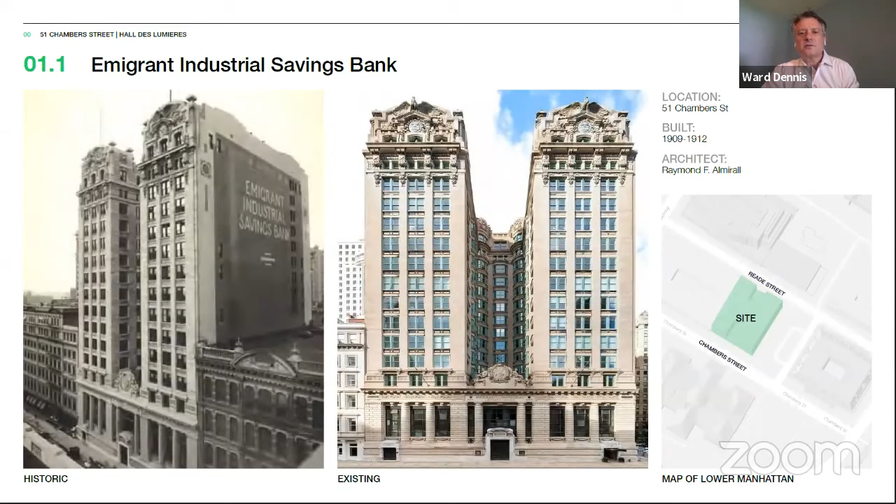Good morning, Commissioners. It's great to see everyone again. As Corey mentioned, this application is for 49-51 Chambers Street, located on Chambers directly across the street from the Tweed Courthouse, right outside the municipal building and right outside our virtual window in the hearing room. The building is an individual landmark and located in a historic district. It was constructed in 1912, designed by Raymond Almirall for the Emigrant Industrial Savings Bank. And of course, the interior of the banking hall is also a designated landmark, and that is the primary focus of the presentation today and the proposal before you.

Just as a reminder, the proposed use for this space, Culturespaces, is a company out of France that operates a number of immersive digital entertainment exhibit venues throughout France. They take different kinds of spaces and repurpose them with video and audio systems that have rotating art exhibitions. The company also manages and operates a number of historic properties in France. So they have a lot of experience, both in terms of transforming these spaces, but also as custodians for the historic spaces. The proposal for 49 Chambers Street would be the first Culturespaces venue in the United States.

This obviously has been a long time in the making pre-COVID, but I think it's very important to note that even with everything we've been going through in the past few months, this project is still very much on track, and it will be a very different approach to banking halls than we're used to seeing, in that it will be bringing hundreds, if not thousands, of people a day through this space, making it a truly public space once again.

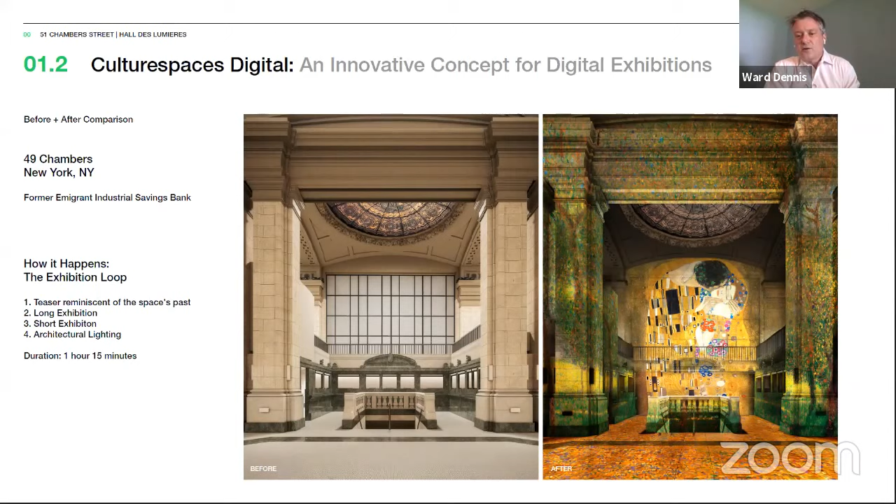The first, and I think most important, was how we were controlling light on particularly the Chambers Street side. Obviously, in order for this program to work, we have to control light within the space. We can't have any light leaking in. We also need to control sound, both the sound coming in from the outside, from Chambers Street, and sound coming out to a lesser extent.

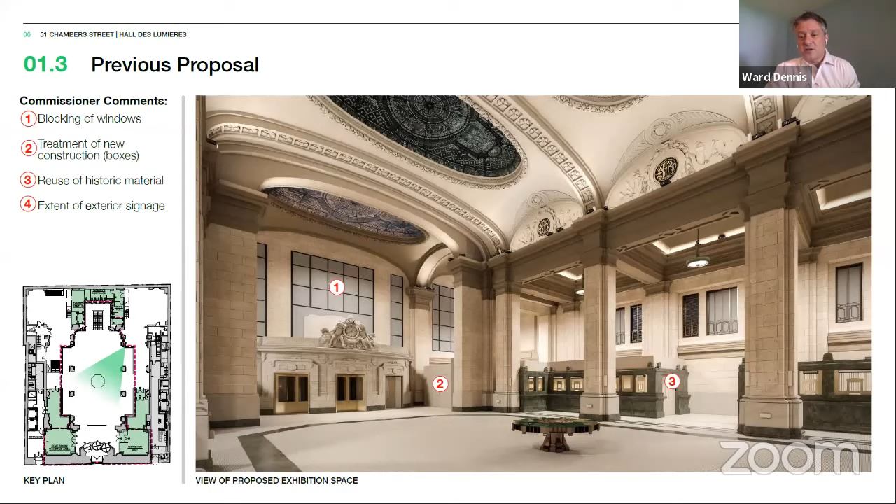And then, not shown in this photo, the extent of exterior signage, which the commissioners asked us to restudy. So in looking at all this, and in particular looking at the windows and the light control, what we arrived at was something of a pivot, certainly away from covering the windows.

What this allows us to do is eliminate all of the box construction in the narthex area. So now all of these new boxes that we are proposing are entirely on the non-designated floor area. This allows us to keep the Chambers Street windows open 100% of the time, so there will always be light coming through the Chambers Street windows.

In addition, we are no longer proposing to reuse historic material. Anything that is removed will be salvaged and stored on site for future reinstallation as needed. And then in addition, as we'll see at the end, number 4, we have significantly reduced the signage on Chambers Street and reorganized it so that it is much more in keeping with the architecture of the building and the symmetry of the building.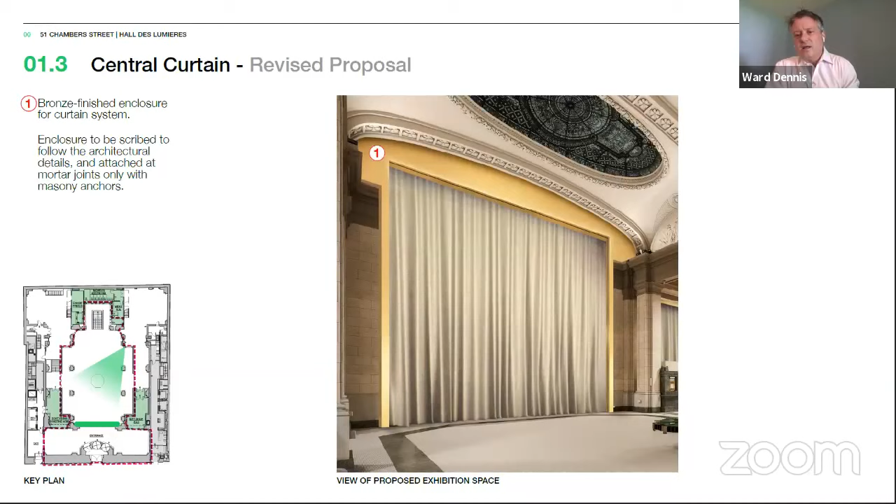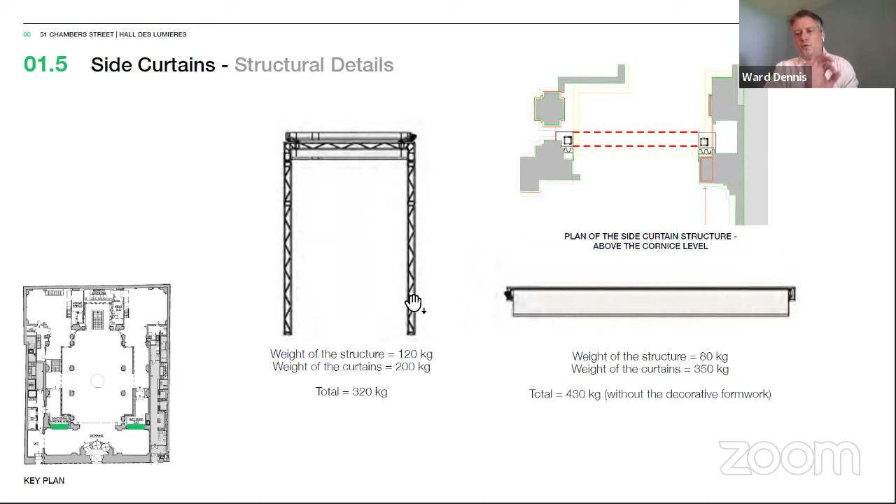This is the view with the curtains up. And with the curtains down, we can see the center curtain and the side curtains here. The side curtains are fully self-supporting—a self-supporting truss, a vertical column with a truss up above and the roller. These set into inset areas on the side aisles that we'll see in a moment, so we can tuck these away, and because it's self-supporting, there's very minimal attachment to the architecture of the building itself.

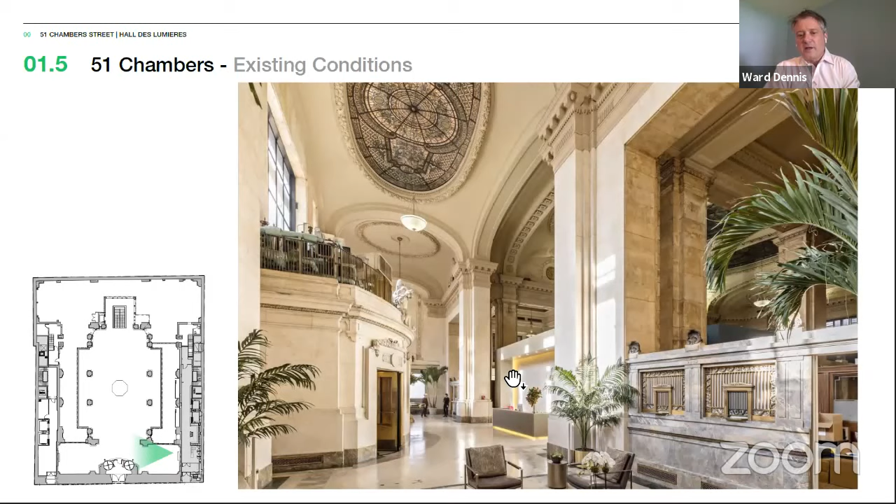Shown here is an existing view of the narthex area. Chambers Street is on our left. This drum here is the revolving doors, and on the right is one of the aisles, and then the center area. The structure you see there is a former sales office for the condo, a temporary installation that is now gone, but you can see the amount of light coming through these windows. This will be a permanent condition under this proposal.

So this is a view with the curtains. Under our previous proposal, we could not show this view because it would have been taken inside the gift shop or inside the ticketing area, depending on which side you were on. Now we've opened this up. We have pushed the enclosures in the side aisles back, and they're actually set back about 3 feet here. The doors here—we are proposing to remove one teller window to drop the sill to make an entry. Previously we had proposed to remove 2, but we can now keep 1.

These doors will remain fully open because the light control is at the north end of this box, through these double doors. And with the curtains up, you can see the enclosure at the center, and then you can also see the enclosure tucked in to this space between the 2 columns here on the right.

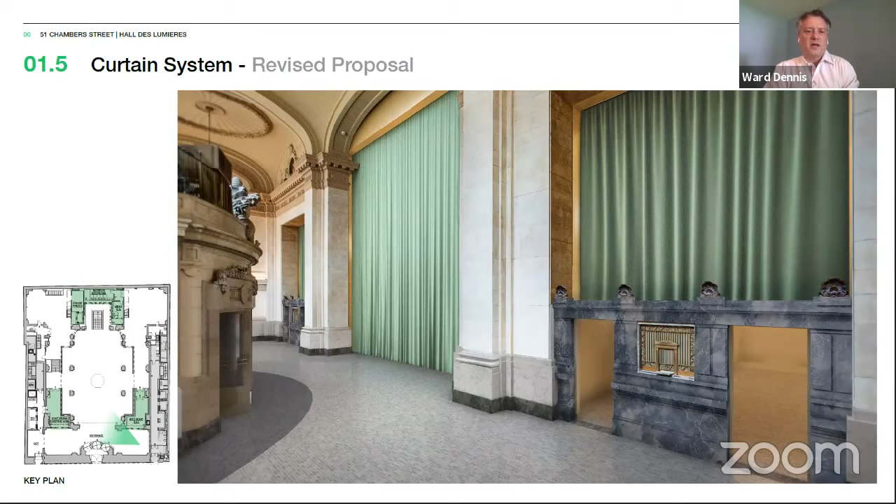And here is the teller cages with the metal finish that will be matching with these enclosures. And then when the curtains come down, the center curtain comes all the way down to the floor. The side curtains come down and rest on the ceiling of the enclosure. This gives us all the light control that we need inside the exhibition space while the narthex remains fully lit at all times.

Again, with the plan showing the removal of the boxes from the narthex area here. And then in red, we are showing the areas of teller counter removal. We previously were removing 2 sections of teller counter here at the ends of the aisles; now we're just proposing 1. And then we're removing 3 teller windows in the center as before and dropping a sill up here. So in terms of overall removal, it's still very minimal.

As I mentioned before, we will no longer be reusing any of the historic material that is removed. Everything will be stored on site, and we have a location to do that.

In terms of the north area of the building, changes here are less so than on the south area, but I think from all the commissioners' comments, the primary area of concern at the public hearing was with regard to the Chambers Street windows. So this is a view looking north to the Reade Street windows.

This is a stair that goes down to Reade Street. We are proposing a box enclosure coming around the backside of this sort of apsidal area at the north end, and an enclosure over the windows. Modifications here—we have added some architectural detail to the boxes so that they're not quite as severe and read a little bit closer to the architecture of the building, but still trying to keep these very much as new insertions and reading as such.

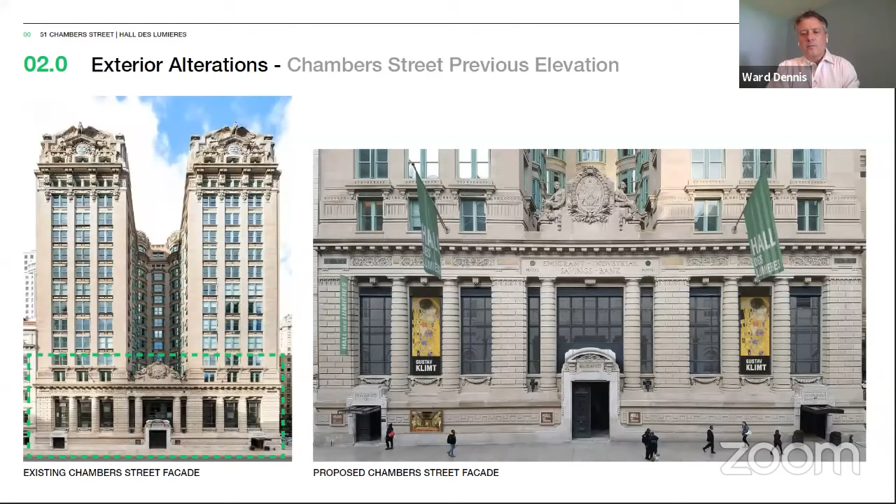At the left-hand entry, we've eliminated the blade sign, the canopy, and all of the signage around that left entry. So just going back to the before and after, there's much less signage and much more orderly signage.

The banner signs at the windows, as I mentioned, will be mesh. These will just be stretched between two poles, one at the bottom, one at the top.

The board signs will use basically a curtain rod system, a pressure rod that will sit vertically between the water table and the cornice above, to hold a board sign. There will be electrical power coming out through a mortar joint, but otherwise no physical attachment or insertions onto the building itself. None of these are LEDs, these are all static signs.

We are no longer reusing any historic material within the space. Everything will be salvaged.

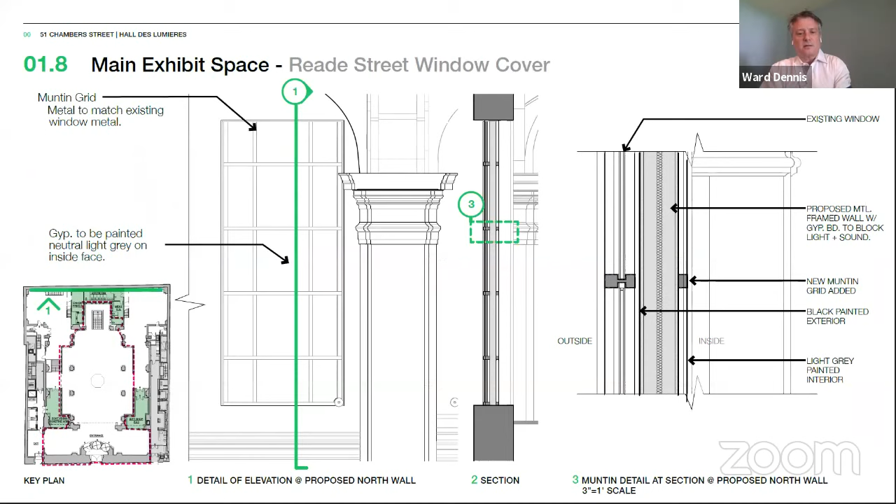I think it has a lot to do with the layout of the space, let me get back to one of the plans. So we have arches here at the side aisles and the arch at the center—this is the designated space. A curtain here would really be curtaining, if we did one, I'm not sure exactly where it would go, but it would basically be curtaining off the non-designated part of the space.

No, I meant by the windows—just regular curtains by the windows instead of the system you're using now.

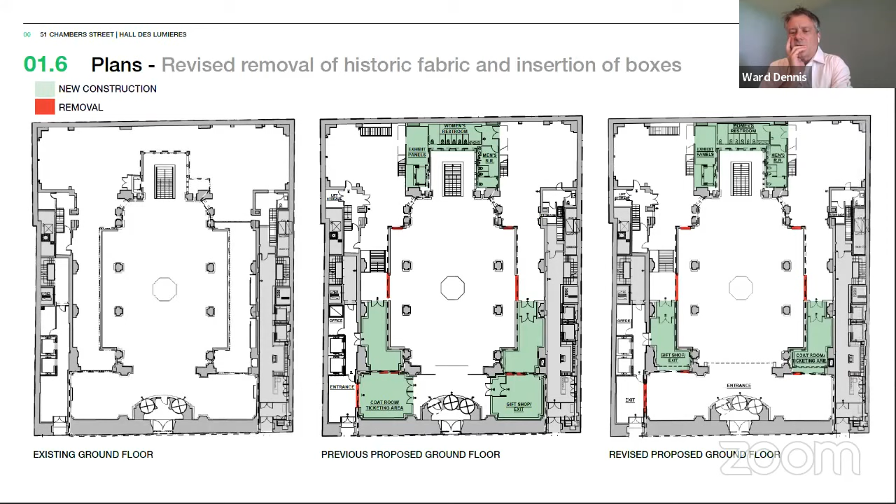We first looked at using curtains on the windows themselves, particularly at Chambers Street, but also at Reade. It becomes very intrusive to introduce curtains around these windows because of the way the architecture of the openings is—the curtains would wind up having to be installed onto the face of the masonry in order to cover the windows entirely. They can't really sit within the openings because there's still light leakage around the opening. If I go forward, I have a couple existing photos right up in the appendix.

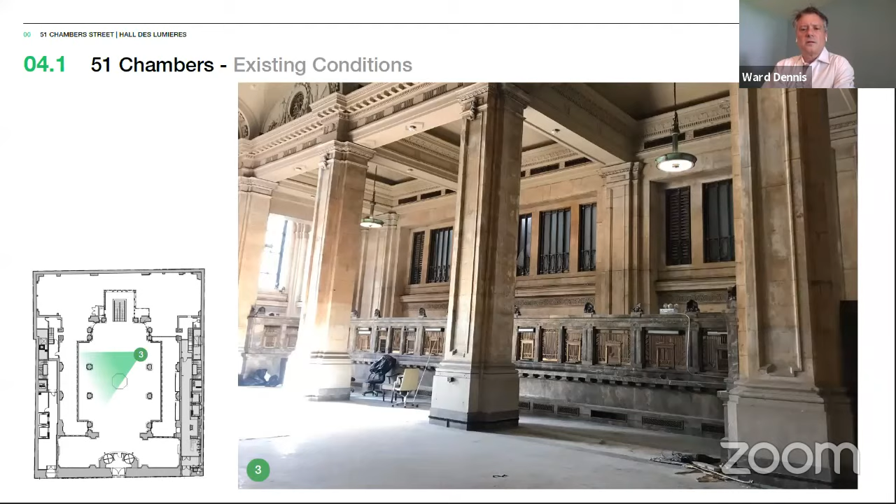It's hard to see here, but you can't set a curtain in here and control the light completely. The curtain would have to basically go over a lot of the architecture. You can see it better on Chambers Street, that you would basically have to have a curtain extending over most of this architecture rather than inside it. So it becomes a much more obtrusive installation than the panels that can set within the windows. Once you make it operable and movable, it becomes harder to do.

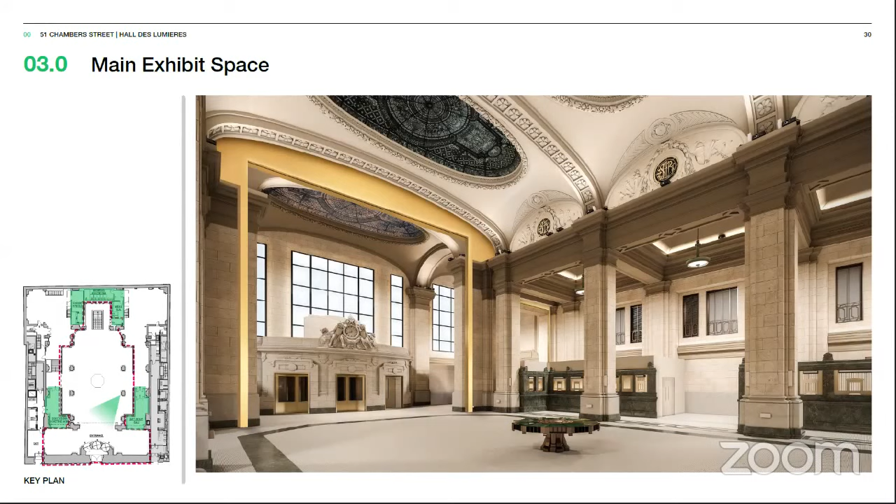As was presented, the last time we saw this, I think the commission was very excited about this new use. This is a space I've actually walked through, and it needs some repair and care, and it's been closed for some time. I think this is an exciting opportunity to have these interior finishes restored and to be able to have the public experience the space.

Everybody embraced this conceptually. There were these four areas, and the largest issue for most commissioners were the windows, particularly those on Chambers Street, and the design and materiality of the little box room enclosures. There were some concerns about reusing portions of the teller cages that were being removed. And then, of course, there were concerns about the amount of signage on the front.

The applicant, as they presented today, has made one big change that pivoted everything, which was to redirect the circulation into the space. By using the main entrance, that allowed them to eliminate or reduce some of the signage on the front. It also allowed them to eliminate the enclosures that were in the designated space, so now the only enclosures are in the non-designated spaces.

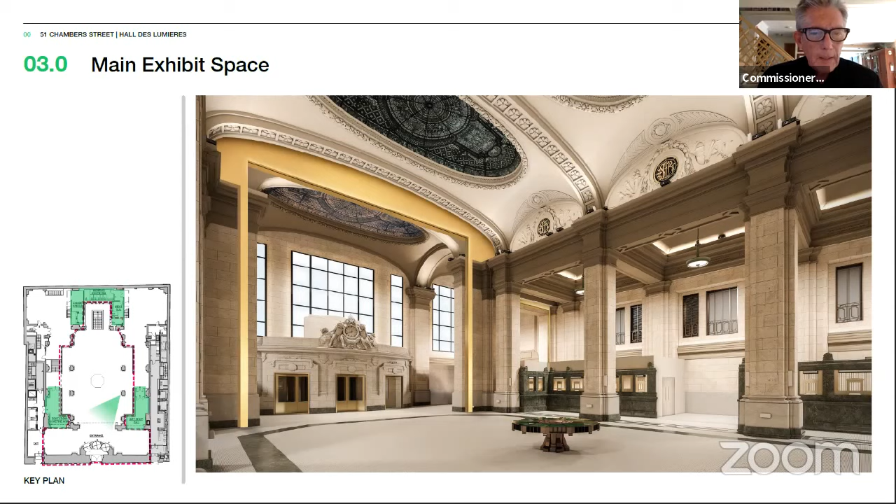My only problem with the application as it is now is actually on the outside and the signage. I think there's still too much of it. If we could flip to the exterior to show it. Yeah, okay, right, perfectly on the right. I think those two big signs over the windows are not needed. I would remove those two.

And I think that floor where the flags are shown, I think those are windows of private condominiums, I would have to guess. And if I were the owner of that place, I wouldn't want a flag flapping out in front of my window, nor do I think it's necessary to be up that high. I think with careful work, it might be lowered down and put more associated with the front door.

I do believe those flagpoles are existing. Oh, they exist? Okay. Well, luckily for those owners, then they're going to have a flag flapping out their window. So I'll eliminate that comment. But I do think the two ones with Gustav Klimt are unnecessary, and so I would remove those.

Otherwise, I think this is a great application and a great pivot. I want to just add, for interest's sake,

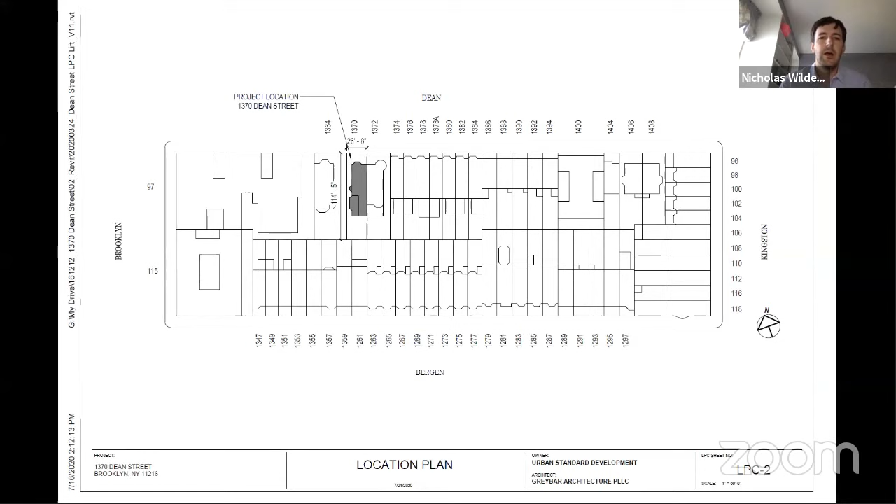1370 Dean Street is located in an area with a wide variety of historic houses. You can see a good diversity of buildings along the block, typically ranging in size from 2-floor single-family houses to 6-floor apartment style buildings. The building is set back about 17 feet from the sidewalk and is separated from it by an iron fence. The existing entryway has a wonderful layered archway, pediment, and sunburst motif. The existing stone stoop and cheek walls are relatively modest in their design, with a half-round profile running at the top of the sides, and recessed panels along the sides with a floral pattern.

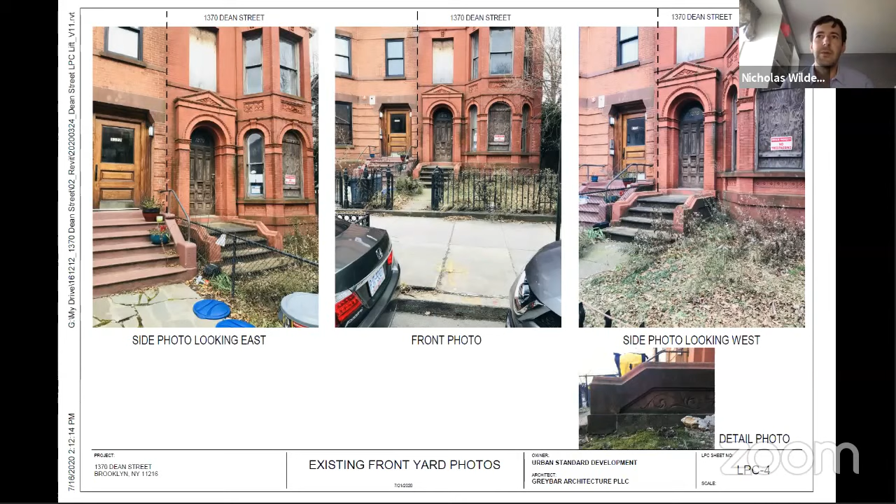The cheek walls are relatively low, only a few inches above the landing. There are existing bolt holes in the facade at roughly railing height that likely give evidence that there might have been a simple railing at one time.

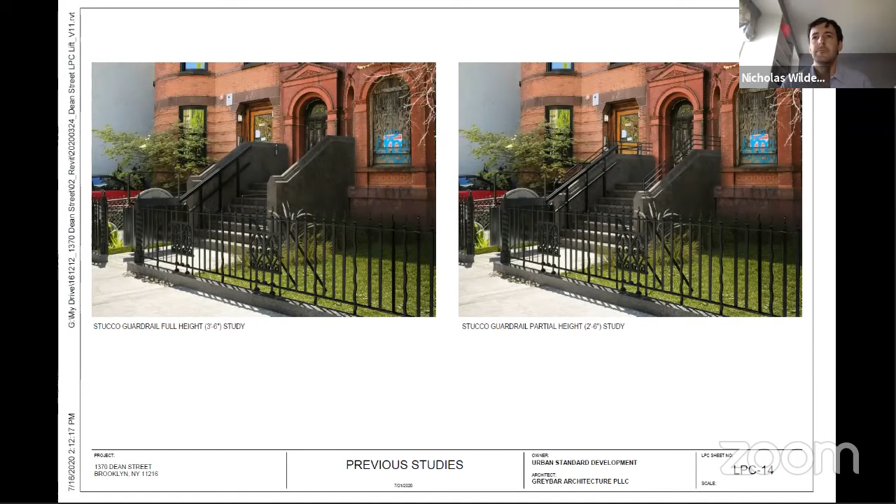Thank you. And commissioners, do we have any questions? Okay, if there are any questions, raise your hand. Okay, Commissioner Jefferson, please go ahead.

Yeah, and if you go back to your plan, my question is - is it because of code that you need that 3-foot additional space from the handicap lift itself? You have 3'8" and then you have 3 feet. Do you need that 3 feet by code? Because therefore you had to enlarge the stair?

We do. In the event that the lift is being used, I still need to provide egress for people coming out by foot, and that's that pathway right there. This is still considered an egress stair leading out of the building, so I have to maintain that minimum distance required.

Okay, thank you. Commissioner Holford Smith. My question - sorry. Okay, sorry about that. That's okay.

My question is about the railing. I think that you described the original stoop wall as having evidence of a railing, an old railing, perhaps being on top of that stoop wall. I'm wondering why you made the decision to put the railings inside rather than on top of the stoop wall, because then you could potentially narrow the overall width of the stair if the rail was on top.

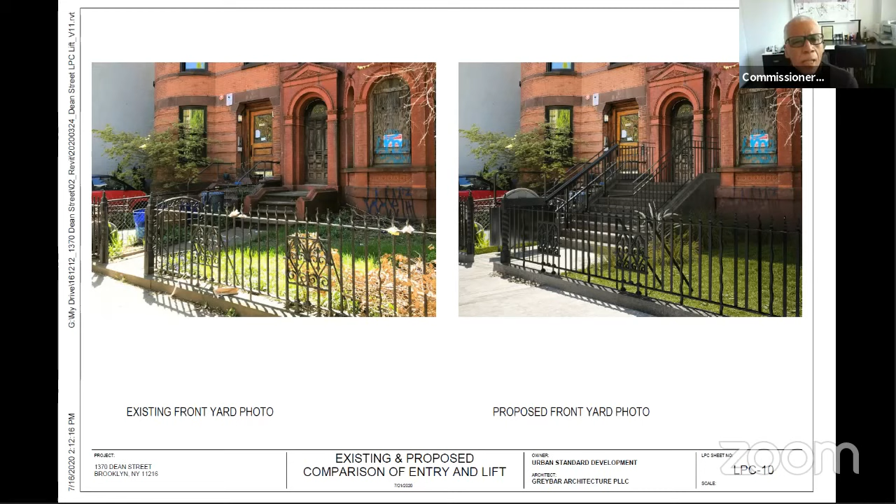Okay, and just to follow up on Commissioner Jefferson's question about the extra 3 feet that you need for an egress path, would it be acceptable to create egress somewhere else in the building if you had another door? And would you then be able to do just the 3 foot wide stoop?

The way the interior layout works, I think there's two items. One is it wouldn't work with the interior layout, the way the whole building funnels through that one main door. The other item is it's a primary egress path, so it's expected that when you go into a building, you're coming out at the same location. So there might be a code issue, and FDNY might have an issue with that. So it wouldn't be ideal, I'll put it that way.

Okay. We did look at, we had originally tried to move the ground floor entrance to the side, the physical address of it. And again, that was an item where FDNY came back and said, you're not allowed to move, for this particular building, they wouldn't allow us to move the primary ground floor entrance to the back or to the rear so that we could put the lift around there.

Okay. All right. Thank you. All right, commissioners, any other questions?

Okay, so this item was read into the record, and so we have not actually taken public testimony yet. So why don't we move to the testimony portion of this item? And if you're in the room or in the meeting and would like to speak, raise your hand so we can identify you. And we'll start with people who signed in advance, if anyone did. So I'll turn it over to our Executive Director, Lisa Kersavage, to manage that.

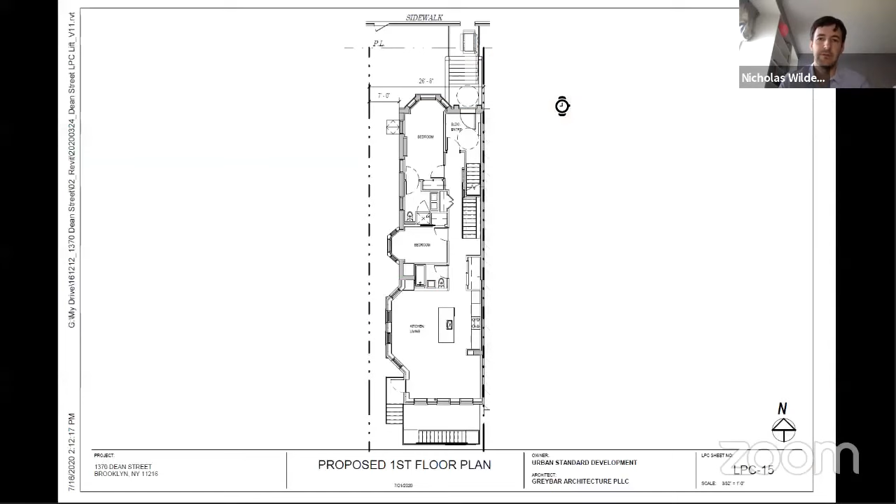We did explore it. It's a lot of ramps - 4 feet of grade change, at least. This here is roughly what the ramp will look like. We would basically be starting right at the edge of the sidewalk and ramping back and forth. You could potentially use vegetation or planting around it to have it look terraced.

Is there enough room for making it look like anything but just a ramp? I'm glad to see that you got it all in there. No, there's not - it's nothing but ramp.

We also, Julian and Bernadette, brought up possibly doing a hybrid system of ramping from one side across to gain at least one step and then going on up. But then you start to change that view, along the fence with more sidewalk or more paving. So a ramp going up the front there would really take up the entire front yard, unfortunately.

Do you have a rendering of that by chance? Of a ramp? No, I don't. It was something we kind of ruled out early - it would have been monumental in its size. It would have changed the grading all around the front of the building, and in addition along our neighbor's side. So we kind of ruled that one out.

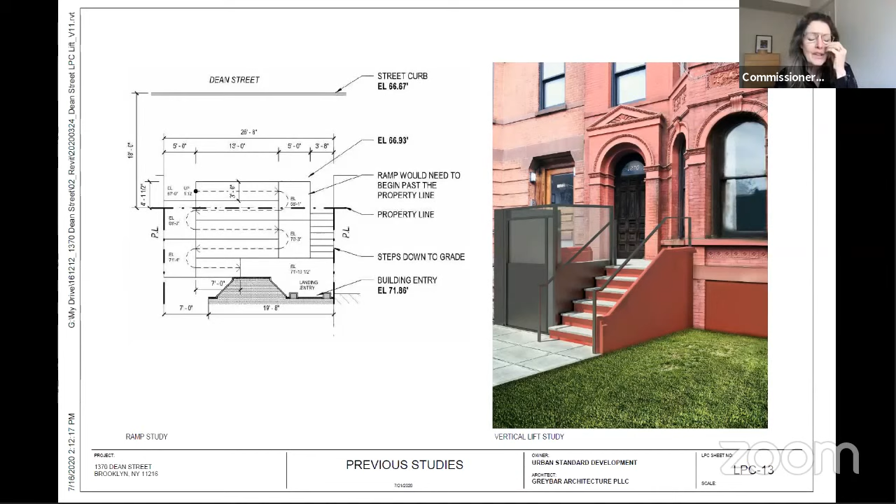I think the only other question I have is whether there's an exploration - and I'm thinking about this because we may see this in the future, and if we want to have a conversation about it we can do that after the questions - but my question is, if the entryway portal is actually extended so that all of this might live on what would be sort of an inside vestibule and more interior looking, rather than a piece of machinery on the outside stoop. I'm wondering if you've explored that, but otherwise we can discuss it during our comments.

I don't, unfortunately we don't have it. There isn't a vestibule, so we wouldn't be able to - you would just be changing the interior structure of the building. I don't know actually how physically you would do that. I hear what you're saying, but I don't know physically how that could be done, because the whole doorway would have to be lowered more to the grade, and then you could go up once you're inside. So physically I think that would be difficult to do.

Well, if I understand what you're saying - basically if I were to come in at grade and then be raised up, I guess I'm describing something that extends, that enlarges the entryway. So right now the entryway is like 8 inches thick, and I'm talking about making it somehow thicker. But again, this is a completely different proposal, so I'm not proposing it - I'm just asking if there was any exploration of that thinking.

No, there was no exploration of it possibly extending beyond the existing building line. What it would say in my mind is that there is an addressing of the idea that townhouses that have historically only had steps up to them might be adapted to include a handicap feature as part of their entryway design, and whether that, from a preservation perspective, is a modification we might think is positive compared to, for instance, some of the mechanical systems on the outside of buildings. I don't know, but...

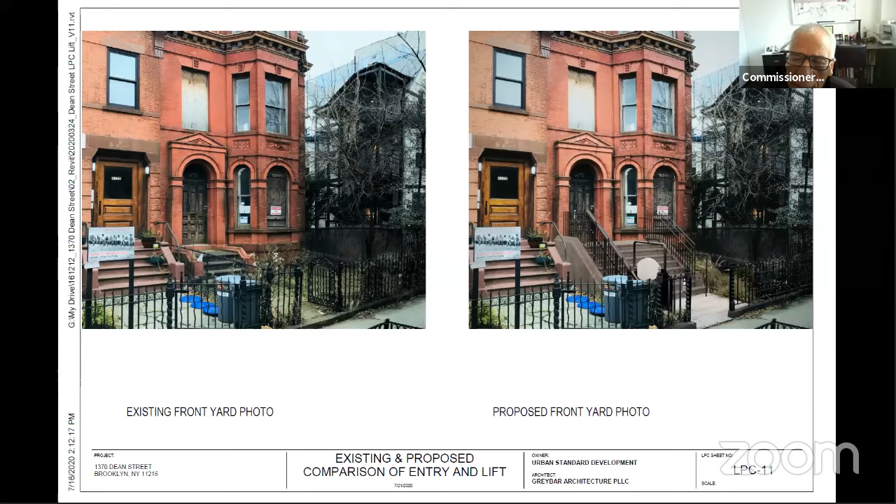Assume I have to accept the proportional changes to the facade. What if you move the mechanism to the right-hand side, so that I don't feel the landing is overlapping the entry portal? If you move the mechanism to the right-hand side, it would feel better. I would feel that on one side it works really well and kind of hides the overlapping and the enlargement of the stair as it is now. Have you tried that in elevation as a study? I haven't tried that idea as a study.

Yeah, I do understand that. I think my issue is just the overlap is so much, 3 feet, and it overlaps the shape, the form. It just doesn't work well—proportions are off. So I thought if you camouflage it by shifting it, it would work. It's just a suggestion.

But I think the 3-foot overlap is only when the lift is actually down and operational, right? So normally it would be stored in the folded position. Correct. So it wouldn't always be as shown in the rendering—that's folded up and closed. And then if it's in use, it's unfolded and then it has the 3-foot overlap. Correct.

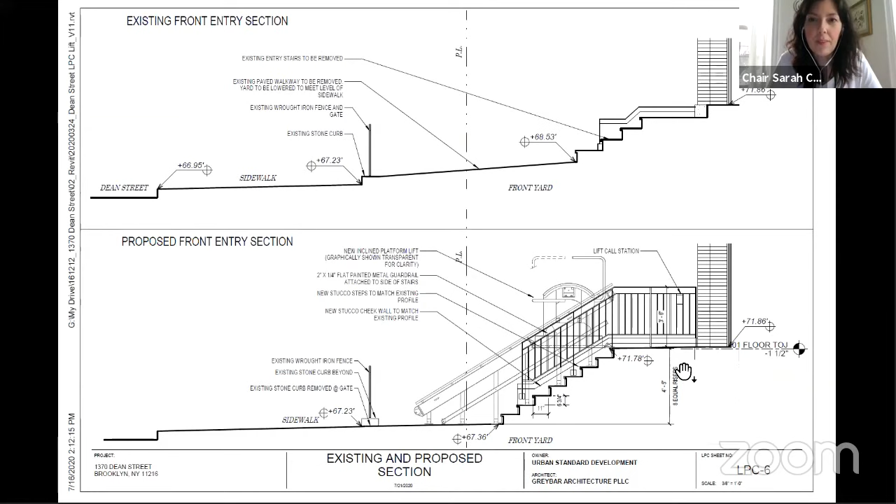Okay, and then I think Corey or Edith, could you move it to LPC 6? Okay, so let's go back to the rendering. Okay, so railing on stoop. Okay, and Commissioner Chapin?

Yes, it is troubling because the extent of change is making a large change to the stoop. And you start thinking, well, as we need to make things accessible, and we do approve those, to what extent will we be faced with many, many of these occasions, changing the stoop configuration? Of course, sometimes there are other solutions, depending on what needs to be made accessible.

And also I started thinking about consequences, because as testimony reflected back in February of 2019, we approved the expansion of this building, which sort of laid the stage for this in that sense. So one of the things we may want to think about as we're letting buildings expand is what other alterations might be necessary in the future. However, we are at a stage where, yes, if someone came to us, we would approve some kind of accessibility. And from hearing the discussion of the applicant, it doesn't seem like a ramp solution would be superior.

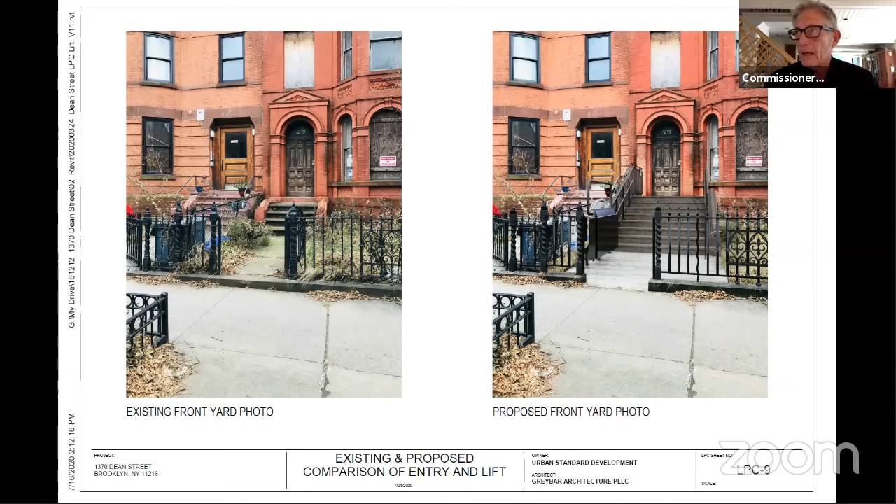And I'll just say I'm going to vote against it, just because you need at least one vote against it. I would prefer that our solution be to eliminate the stoop, like so many stoops have been eliminated. We're used to seeing buildings with no stoop. The stoop was eliminated, bring the whole door down, deal with it on the inside, and let it go. But I think this is an abomination, and I am railing against the law a little bit as it's applied to every single building. So I think there should be exceptions, and I think this should be one.

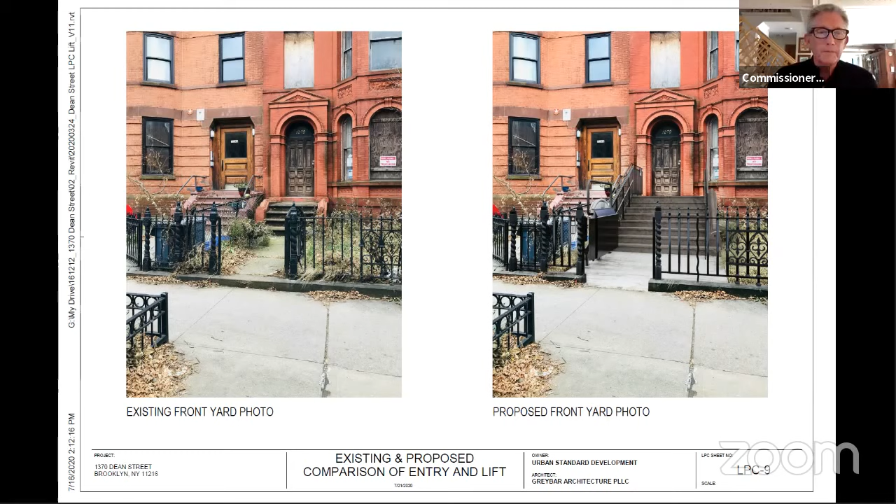Lutfy. Commissioner Lutfy? Okay, I think she has stepped away. Commissioner Chapin, did you have an additional comment?

Yes, I just did want to say that I think that the color of the cheek wall should be as close as possible to the original. Okay.

All right, so, you know, I think the idea of removing the stoop is an interesting one. It's not the proposal that's before us. It's something that has happened to brownstones historically when they were converted to multiple dwellings. What often happened is that you sort of had a truncated window, or sometimes you have enough height to have a full window at the former parlor floor entry, and then you have to sort of figure out a door that inserts underneath it. I think that would be an approach, and could be an approach that's consistent with historic adaptations of these buildings. But I also think that maintaining a stoop is okay.

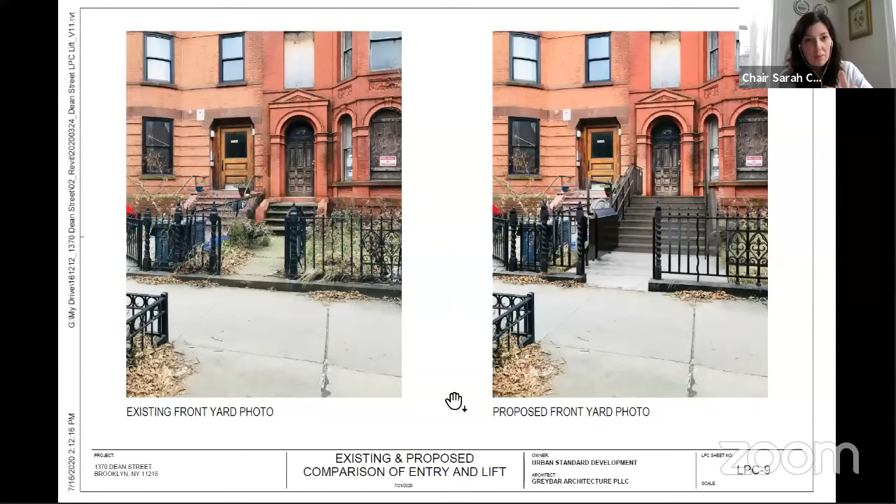One of the reasons I feel comfortable with it is that I think there's an effort here to match the details, materials, and finish. I think the railings could be improved, and maybe they could explore some of the ideas mentioned, like flipping it or putting the railings on the cheek walls. But if you look at the streetscape, this is not a continuous row of buildings with uniform stoops lined up down the street. These two don't even match each other, and are anomalous on the block, and there are some bigger, heavier stoops further down this block.

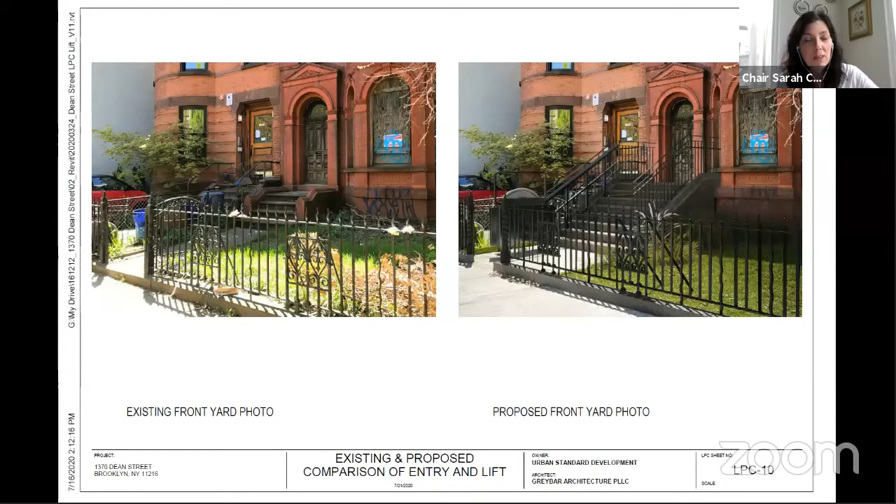I might feel very differently if this was part of a long row with continuous stoops. But given that there's some variety on the street, with box stoops down the block, and that these two kind of stand alone and currently don't match each other, that gives me comfort that an alternative stoop design at this particular building is appropriate, to accommodate barrier-free access. So I'm on the side of it being okay, and I think that makes six of us in the okay camp, maybe others. I think we could vote to approve it, but still encourage them to think about some of the suggestions made, like sitting on the wall and flipping it, and also enhancing the railing design to relate better to the historic ironwork in the areaway.

So why don't I go ahead and read that, and we'll see where we end up.

This is an application for a certificate of appropriateness in the Borough of Brooklyn, docket number LPC 19-33774, 1370 Dean Street in the Crown Heights North Historic District, a Queen Anne style semi-attached house designed by Gilbert A. Schellenger and built in 1885. This is an application to alter the stoop and install a barrier-free access lift. I note that Certificate of Appropriateness 1924-500 was issued on February 19th, 2019, approving the demolition of a rear ell, construction of a rear yard addition, and creation of new masonry openings and rooftop bulkheads. I note that the building's style, scale, materials, and details are among the features that contribute to the special architectural and historic character of the Crown Heights North Historic District.

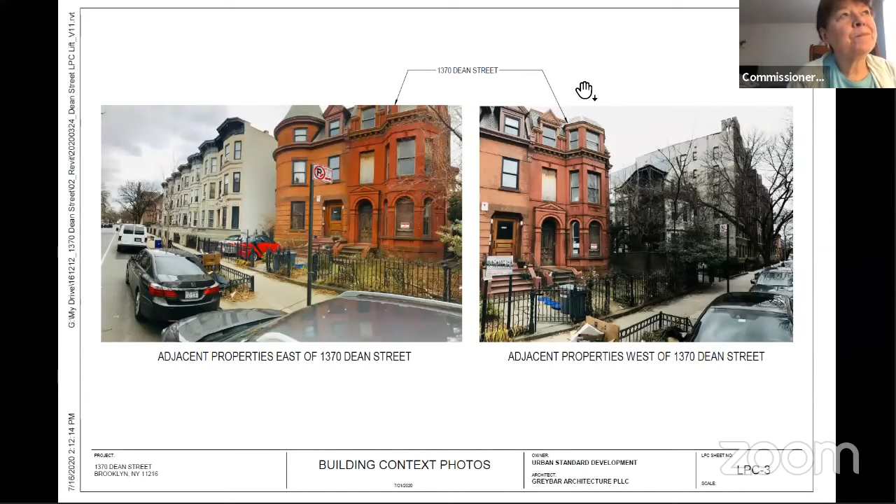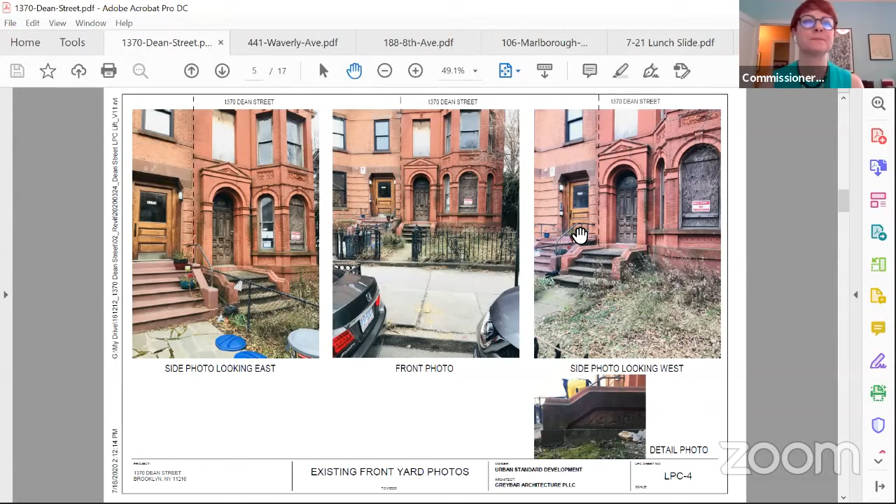Chair Carroll, aye. Commissioner Bland, nay. Commissioner Shamir-Baron, aye. Commissioner Chapin, aye. Commissioner Chen, aye. Commissioner Devonshire, aye. Thank you. Commissioner Gustafsson, aye. Commissioner Jefferson, aye. Commissioner Lufty, not present. Commissioner Holford Smith, aye. Okay, with 8 in favor, 1 opposed, 1 not present, the motion carries.

So that's approved with those modifications, and I encourage you to continue to work with the staff on those.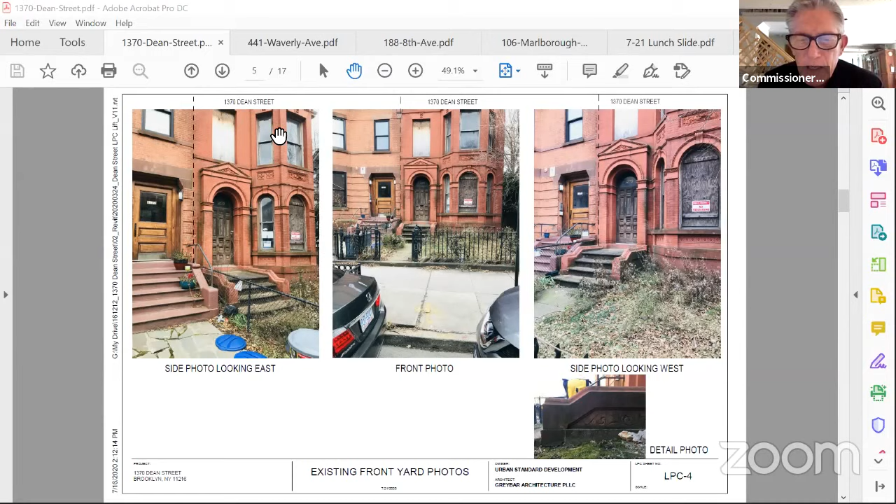Before we completely eliminate this, if you don't mind, could you go back to LPC 3? I just want to illustrate my point. That's a very good picture there on the left. My house that I was being very personal about could be that. It's exactly one of those houses, in fact maybe the same architect, who knows. And you see those have, I think, L stoops. If such a proposal, say one in the middle of that row, came in with the same proposal to make a four family, the only way to deal with that is literally to remove the stoop and redesign it.

I'm not whining here, I'm not going on and on. I'm just saying this is going to confront us in the future, and that example down the road, down the street here, is going to really make it difficult for us to approve. Whereas your point about the two houses here being different, not part of a row, made it easier to see this as an appropriate approval, even though I voted against it. I just wanted to make that point because we're going to be facing this.

Yes, thank you. We are. Okay, thank you. All right, and we'll move to the public hearing schedule.

The first item of the Preservation Department's public hearing agenda, number 1, is LPC 20-10913, an application for a certificate of appropriateness in the Borough of Brooklyn, block 1962, lot 4, 441 Waverly Avenue in the Clinton Hill Historic District, an Italianate style row house built circa 1868. The application is to modify window openings and install a rear deck.

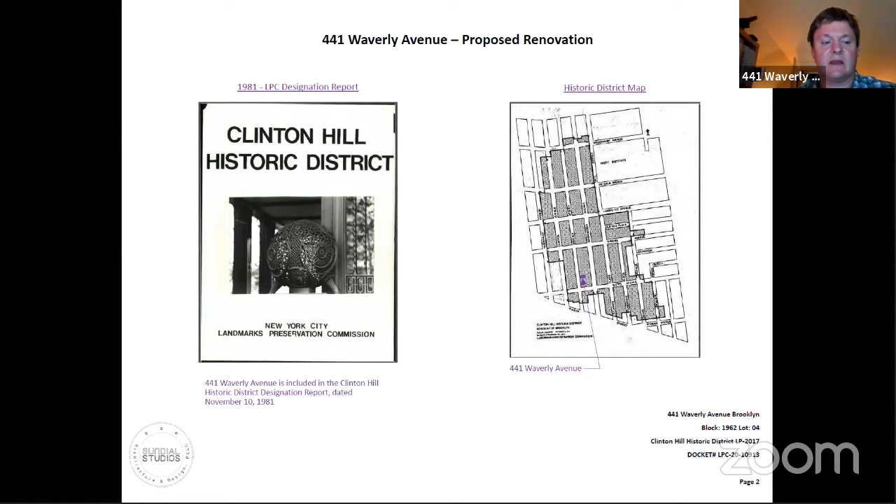What brings us before you today is the proposed work at the rear facade. This work includes combining the rear windows into a single opening at the basement and parlor levels and installing a small deck which accesses the rear yard from the parlor level. On the left, you'll see the existing rear facade, and on the right is our proposed single window opening. Then you see the deck and the stairs coming down, and below that is a photo of the minimal view rail system that we're also proposing.

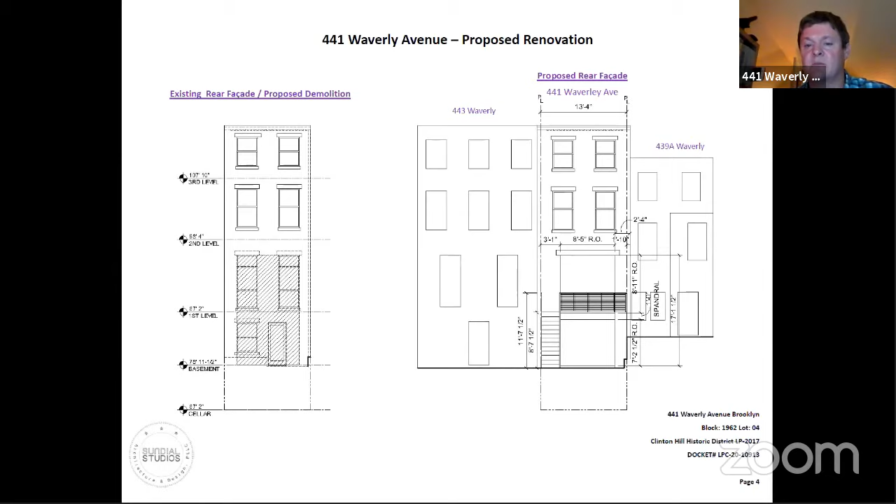On this slide to the left, we can see the proposed removals, and on the right, we see the proposed opening at 8 foot 5 inches wide, with the right side pier aligning to the existing pier width and measuring 2 foot 4 inches wide and 1 foot 10 to the property line. The opening would be 17 foot and 1.5 inches high with a 1 foot intermediate spandrel. The left side pier would be 3 foot 1 to the property line, which matches the width of the proposed stair assembly accessing the garden.

Here we see the existing and proposed basement plans. In the proposed plan at the top of the page, you can see the line of the 3 foot wide proposed deck above, which would be supported by 2 small non-occupiable storage piers, one of which includes the steps down to the rear yard. These piers would be finished in stucco to match the rear facade.

Here we can see a mock-up of the window and the stair assembly, or the deck, stair and rail assemblies. The window opening is shown in blue tape and would maintain the width of the right pier and the head height of the existing windows at the parlor level. The orange flag material represents the top of the deck, stair, and rail assemblies.

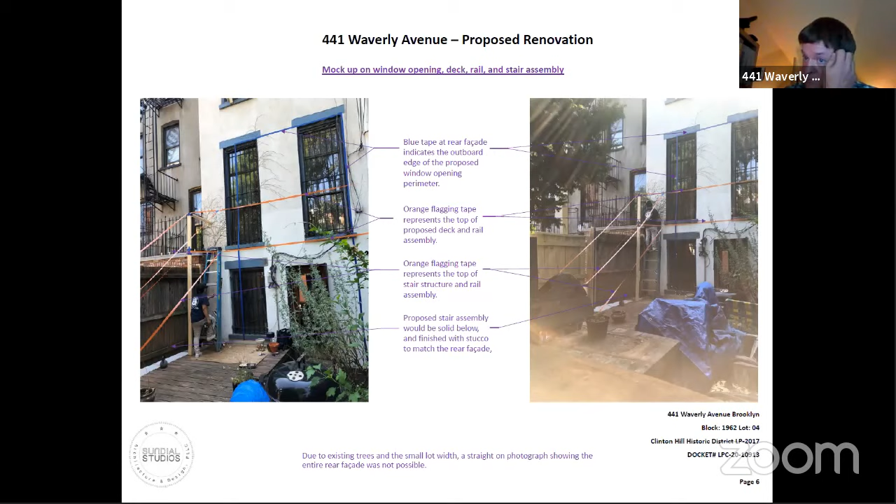This slide shows the 12-degree diagonal view angle where the rear facade may be seen from Washington Avenue through the Hollenbeck Community Garden and an access drive serving PS 11. 441 Waverly is outlined in red.

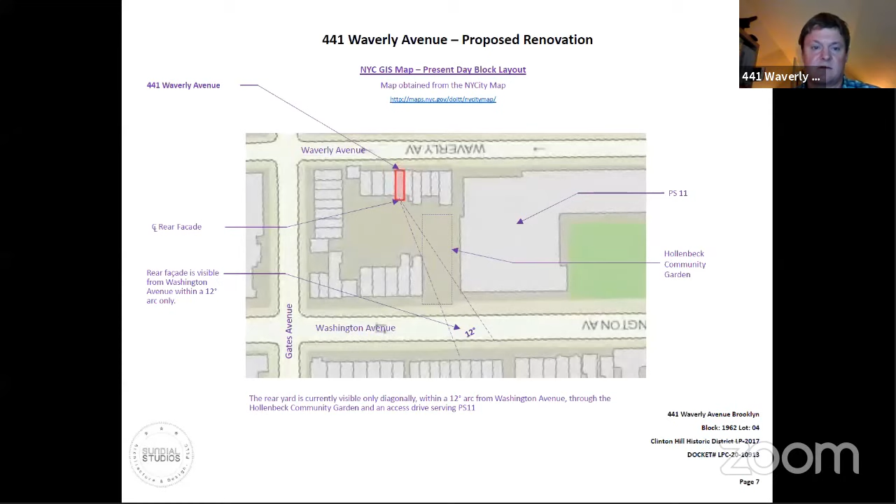Here we can see the rear facade within the view angle from the Washington Avenue sidewalk. On the left is a photo taken January 30th, 2020, and on the right is a photo taken on June 21st, 2020. In both these photos, we've mocked up the scale and location of the proposed opening.

So in this slide, I actually reached through the bars of the community garden to take pictures. Again, on the left, the photo was taken on January 30th, 2020.

And on the right, the photo was July 9th. I was given access to the community garden on the same day we performed the mock-up. On the left is a photo taken from the rear of the community garden fence, and you can just make out the left side of the window opening with the blue tape. On the right, I found the most visible location I could find within the garden to shoot this rear facade. This photo was taken about 10 feet high, since the 6-foot garden fence makes it not very visible, but with the selfie stick, I was able to reach up and take the photo from about 10 feet above the ground.

This slide shows the neighborhood context of the rear yard. 439A to the north includes a first floor deck atop a full width basement extension with a 2-story addition above it. Our building, 441 Waverly, is in the middle. You can see our proposed deck and stair. And 443 to the south contains a first floor deck over a basement extension that was just recently approved and is under construction now. These are Google satellite images of the rear facades, again showing that same context.

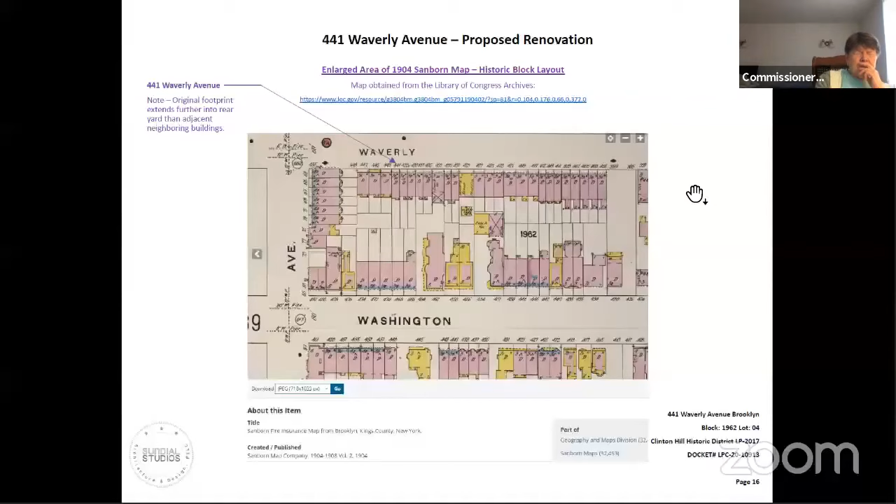So I think the presentation was very clear and the proposal pretty straightforward, and we don't have any questions. So I'm going to move to close the hearing, and then we'll begin our discussion. Commissioner Chapin, would you make a motion to close the hearing? Motion to close the hearing. Commissioner Holford Smith, would you second that motion? Second. All in favor, say aye. Aye. Aye. Any opposed? Okay, so the hearing is closed.

I think, as this presentation was very clear, there's minimal visibility through this garden of this double height window that's before us, and a deck, which I believe is even less visible. So let's start our discussion.

Commissioner Lutfy, would you like to start this one? Sure. Yeah, I think it was a good presentation, and I happen to agree with what you're saying. The visibility is minimal, and I also feel that the windows look fine.

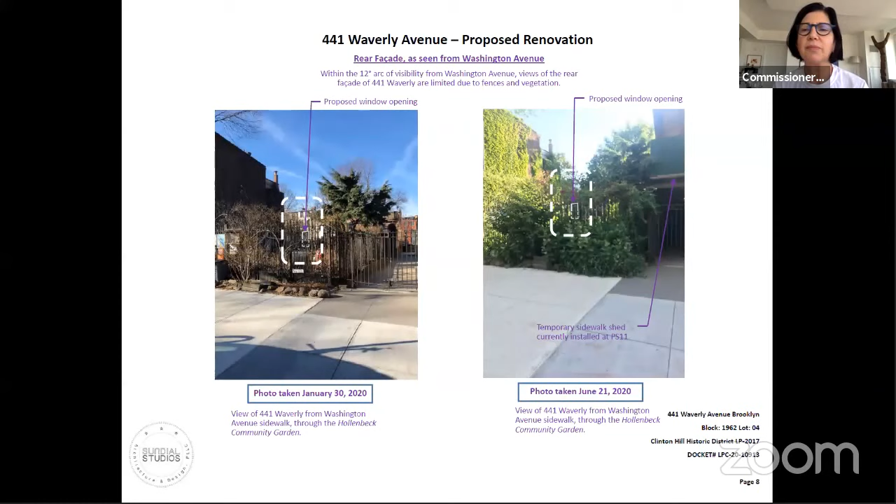Okay. And Commissioner Bland? Yeah, this sort of renovation of a townhouse is becoming almost de rigueur. We see it all the time. I think this is done very well. Its visibility is more than in some cases where it's not at all visible, because there are little pieces of visibility, but mostly from a distance. So I think this is very appropriate.

Commissioner Chen? Agree. Commissioner Devonshire? I think it's appropriate. And Commissioner Chapin? I agree, it's appropriate. Commissioner Holford Smith? I agree, appropriate, very modest. Baron? I agree, this is appropriate.

And I agree. I think that the size of the opening, while double height, is modest. It retains masonry on both sides and retains the scale and character of this house. And the deck is consistent with other decks within the context.

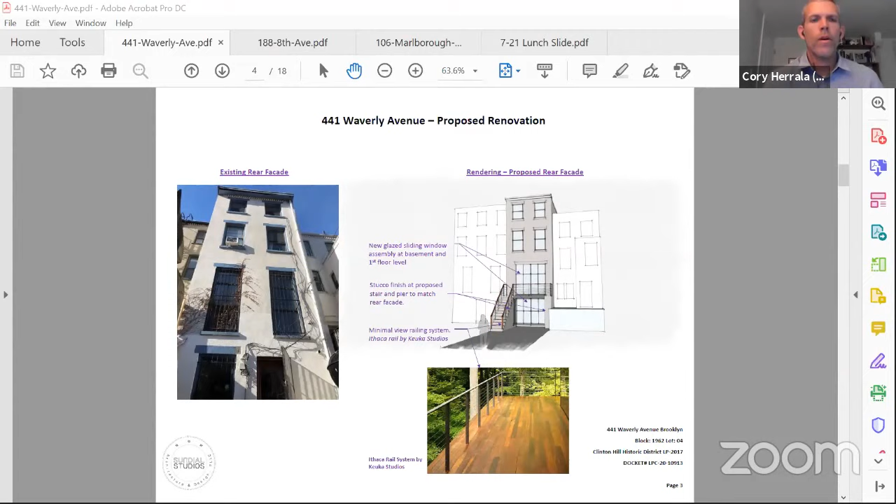Next item is item number 2, LPC 20-10654, an application for a certificate of appropriateness in the Borough of Brooklyn, block 1074, lot 41, 188 8th Avenue in the Park Slope Historic District. French Renaissance style row house designed by William J. Dilthey and built in 1897 to 98. The application is to modify masonry openings.

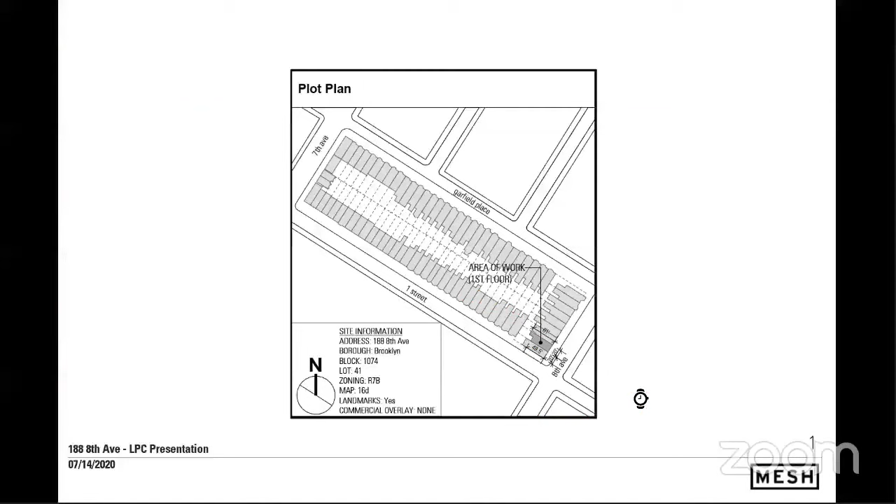This is concerning the house at 188 8th Avenue. I don't see my, okay, can I just click through here now? Yes, you can just advance the slides by clicking on the first slide. There it goes. Great, thank you. Okay, so this is where the house is located. It's on 8th Avenue, one house away from the corner of First Street in Park Slope.

This is a plan showing the photographs. We are talking about the rear facade of the building. We're replacing all the windows in the building, but they're all being done at staff level, except for the one that we're going to show you right here on the rear opening. So this is the rear of the house. You can see here the opening we're talking about is minimally visible from this particular vantage point on 8th Avenue. You can see it right here in the bottom left the most. You can see a little bit up here in the top left. You can't see it here from view number 3 when you get past a certain angle.

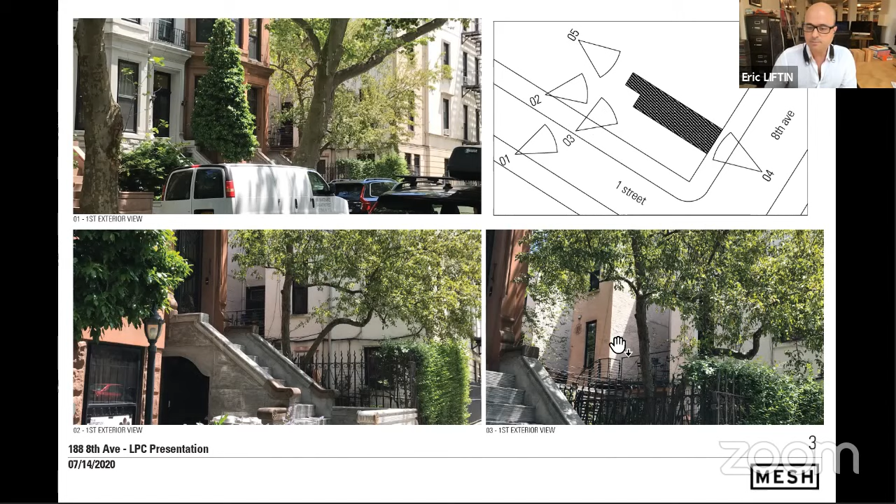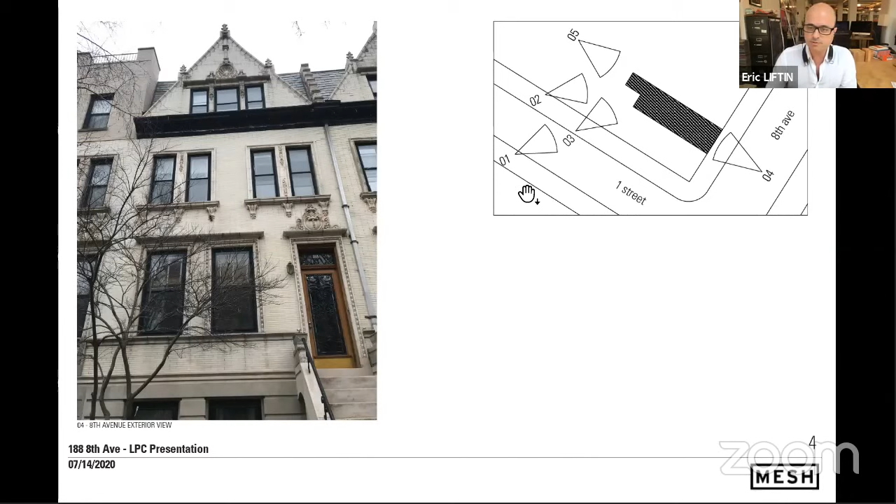And this is a view of the front facade. We're not proposing any changes under this application, but it's just provided here for reference. This is the rear facade taken from the rear yard of the house. So what we're talking about, similar to the last application, we are talking about combining the door and the window into a larger opening. We are preserving the outer extents of the openings and taking away the brick pier that is in the middle here to create a large opening. The key point here is that in doing so, we're removing a stained glass transom window that's above the door.

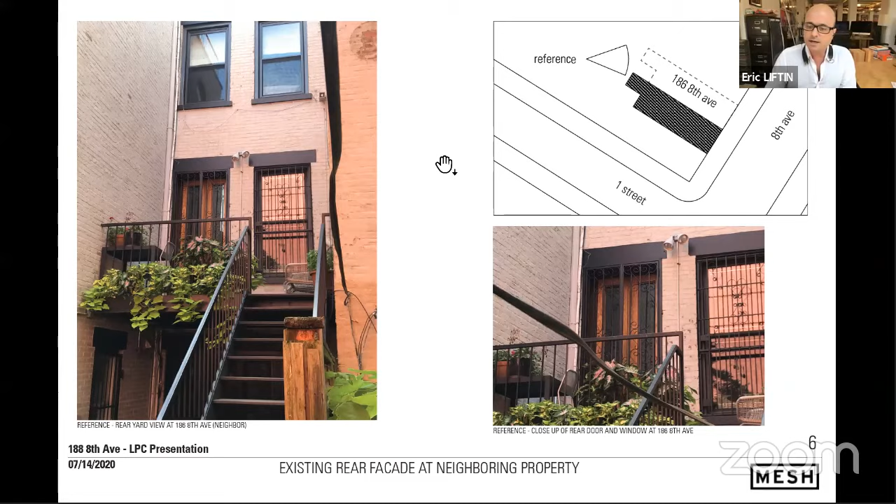This is a reference photo of the next door neighbor. There's no transom here, so we don't know the history of why that stained glass transom is there, but it's not a pattern that repeats itself on the block. Similarly, we don't feel that it is a particularly special example. I'll show you a picture in a second.

This is a plan showing the area to be combined. This is showing the proposed sliding glass doors that are going to take the place of the window and door. This is the rear facade, again showing the dimensions, showing the existing condition and the proposed condition.

This is a photo of the stained glass window. I would say it's not a particularly special example of craftsmanship. It's something that we can't really use anywhere else. There's no other place in the house that naturally lends itself to including a window like this. So there's really no way that we can just kind of move it over and use it in a different spot.

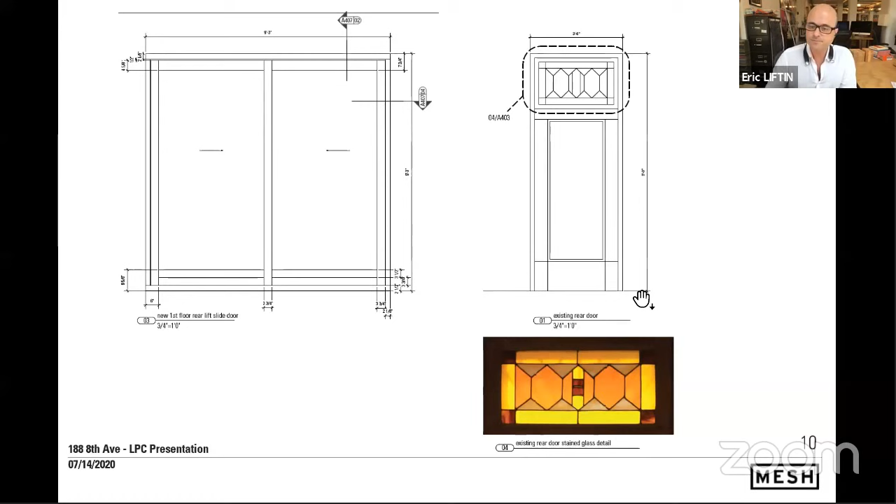These are the details of the sliding doors that we're replacing it with. They are wood framed with triple glazing to much improve the thermal envelope of the house. These are just examples of the product in other installations. And this light gray is the color that the frame is going to be on the outside. And that's it.

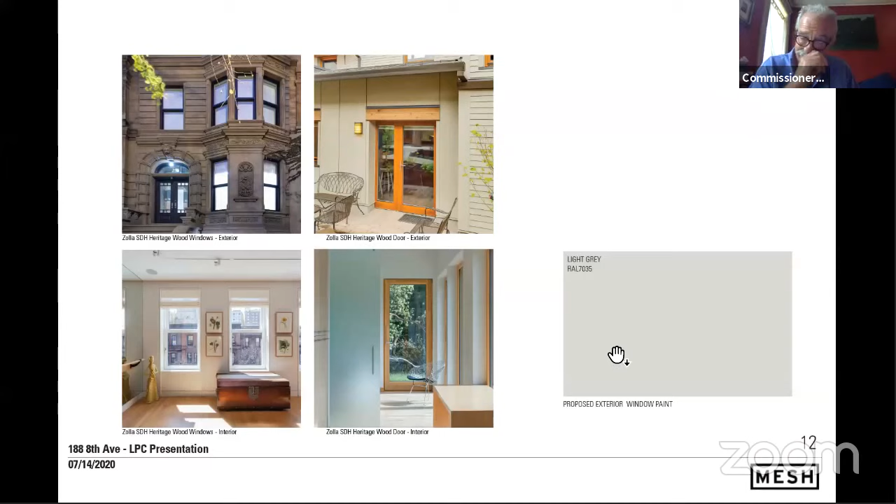Okay, thank you. All right, any final questions? Okay, then I think we will move to close the hearing. Commissioner Devonshire, would you make a motion to close the hearing? So moved. Commissioner Jefferson, would you second that? I so second. Okay, all in favor, say aye. Aye. Aye. Any opposed? Okay.

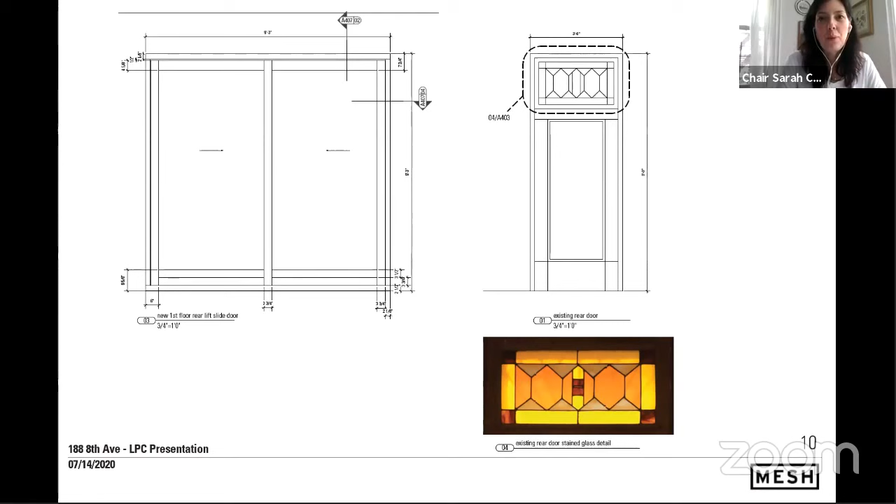So the proposal before us is for these alterations to the rear facade. There is a stained glass window that does not appear to be a feature found in any of the other buildings in the row, and I think it's uncertain what its date is. The applicant and owner have testified to its quality, or commented that it wasn't the highest craftsmanship. The proposal is to remove it and enlarge the openings to create sliding windows and doors that open onto the deck. So let's start our discussion, working around the table.

Commissioner Holford-Smith, would you like to start this one? Sure. It's always sort of regrettable to lose something that's a little unique and different, but I don't find that this piece of stained glass is compelling enough to warrant finding it inappropriate. So I think that I can find that this is appropriate.

Okay, Commissioner Chapin? I think that it's really appropriate. It's very similar to other things we've approved, and I support it as presented. Commissioner Devonshire?

Along with what Fred was saying about how often we have this sort of alteration, I'm sure that if there had been large expanses of glass easily available when these houses were built, every one of them would have a rear facade that looks like this.

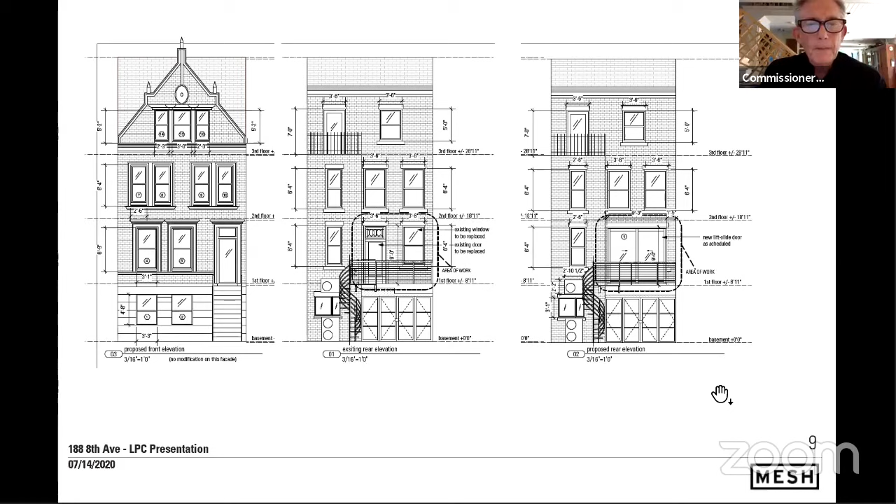Chair Carroll, Aye. Commissioner Bland, Aye. Commissioner Shamir-Baron, Aye. Commissioner Chapin, Aye. Commissioner Chen, Aye. Commissioner Devonshire, Aye. Commissioner Goldblum, Aye. Commissioner Jefferson, Aye. Commissioner Lutfy, Aye. Commissioner Holford Smith, Aye. Okay, with 10 in favor and unopposed, the motion carries.

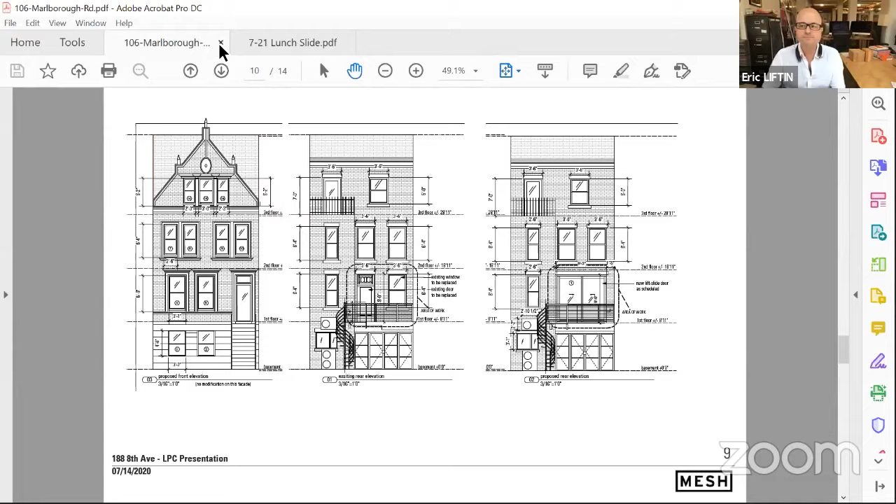The next item is number 3, LPC 20-02968, an application for a certificate of appropriateness. Borough of Brooklyn, block 5095, lot 36, 106 Marlborough Road in the Prospect Park South Historic District. An American colonial style freestanding house designed by John J. Petit and built in 1908. The application is to install HVAC units at the roof and to replace windows.

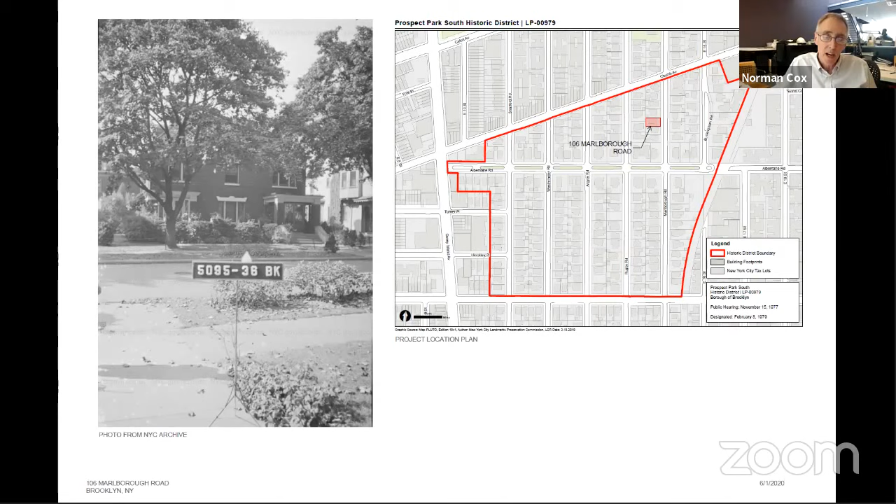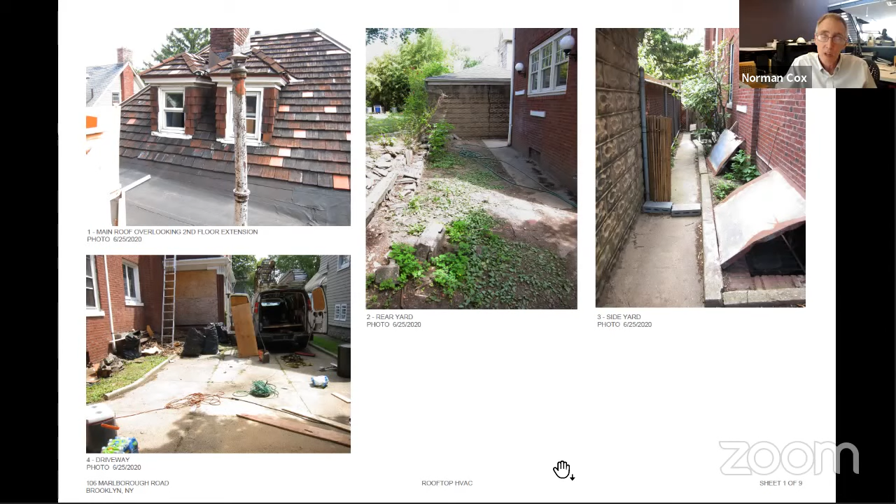So we propose that the best location for the units is on the flat roof of a second floor extension at the back of the house. That's seen in the upper left-hand photo on this slide. This is the only available rooftop location on the house.

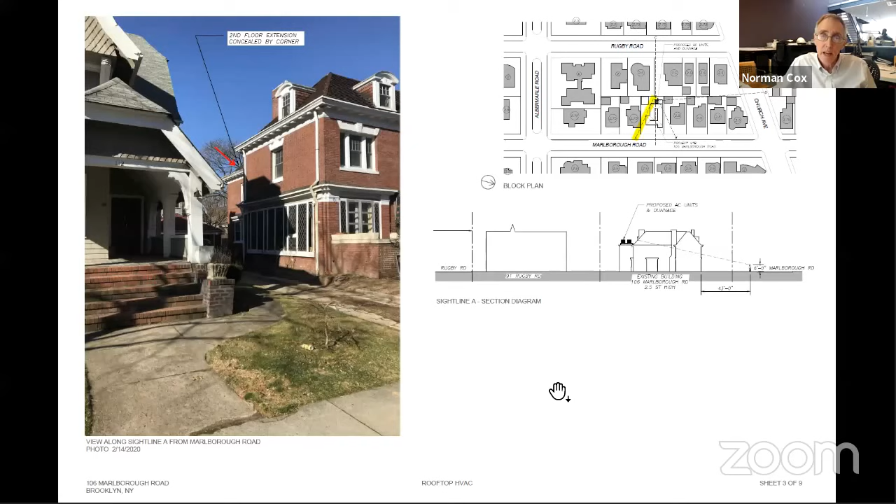From Marlborough Road, the units on the rear extension roof will not be visible. They are blocked by the main roof of the house. This is a view from the southeast. And this is a view from the northeast.

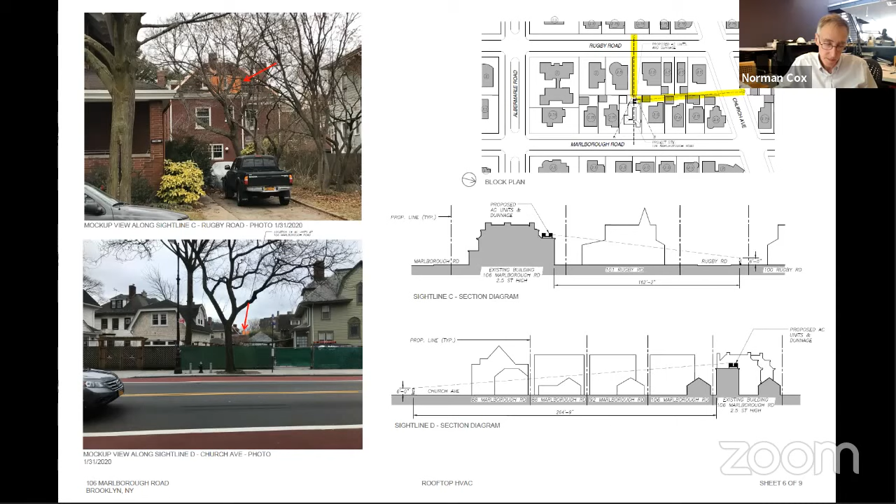To conceal the units from these vantage points during the winter, we propose to construct a wood screening fence, seen here on the elevations. The fence will be just high enough to cover the units, and will be finished with a penetrating stain in a color to match the roofing tiles.

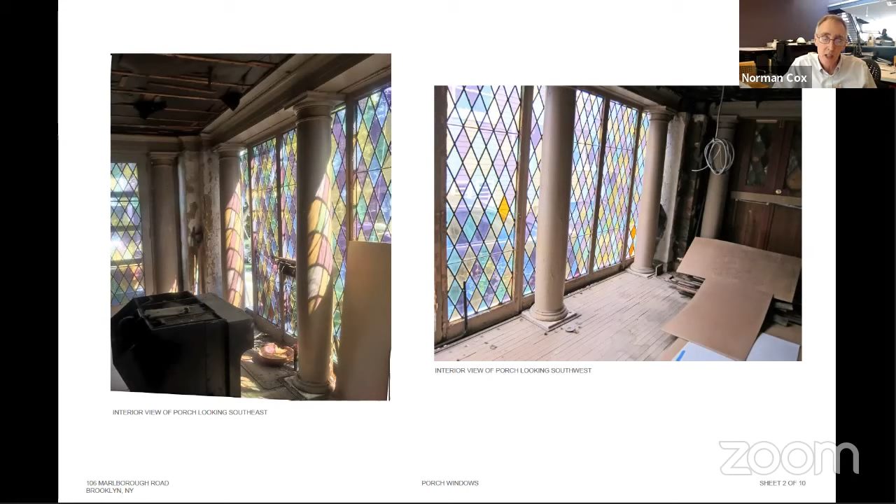The enclosure consists of individual wood frames holding panels of pastel colored leaded glass in a harlequin-like pattern. Behind the glass panels, and unfortunately concealed from view, well-proportioned columns are positioned on the three sides of the porch.

Based on discussions with a stained glass restorer familiar with the neighborhood and the house, we believe the leaded glass panels are not original and were installed many years after the house was constructed. The panels are in poor condition. They were not well constructed to begin with, and the wood frames and their mountings are deteriorated. Many pieces of glass are missing or damaged, and the lead cames are in bad shape.

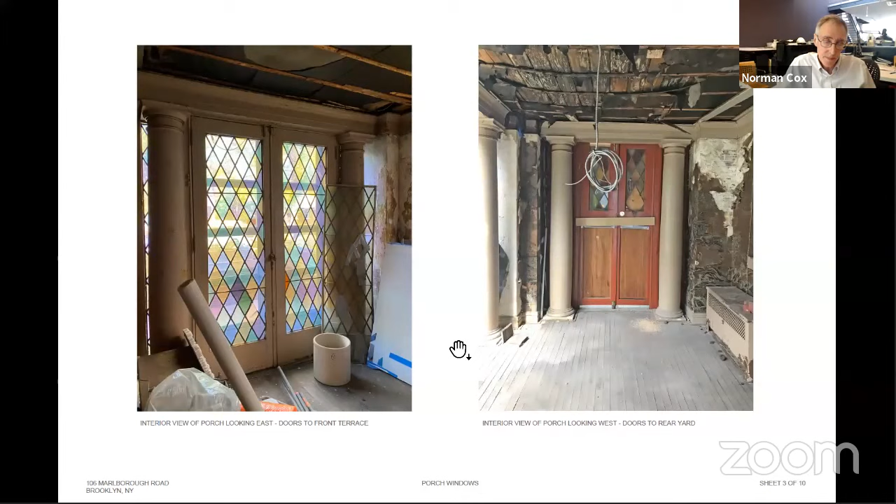There are many other leaded glass windows in the house, and it is obvious that neither the style nor the quality of the porch panels are comparable to these existing windows.

We propose to replace the leaded glass panels with new wood and glass panels. Following discussions with Landmark staff, we shifted the position of the panels toward the interior in order to reveal the columns. The columns will regain their role as an ordering and structural element, as well as restoring an important original feature of the house.

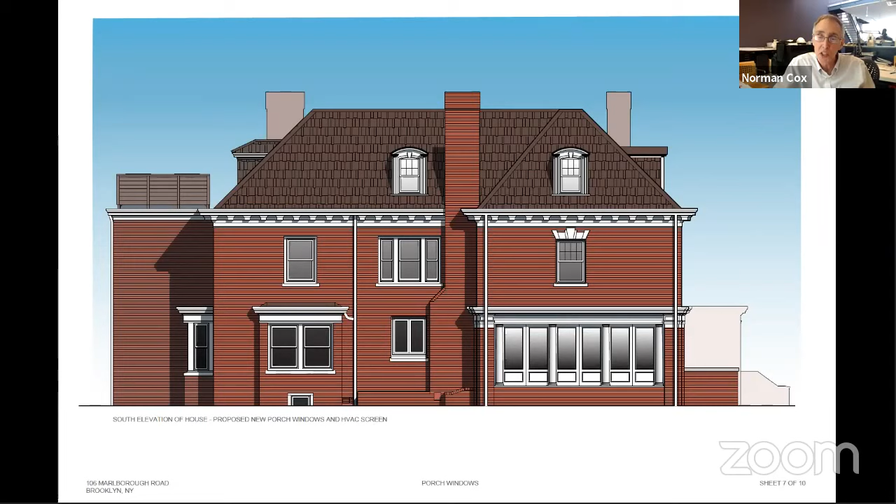How do I back up? You can use your up arrow key to go to the previous slide. There's quite a bit of lag here, sorry. You wish to move it to the previous slide? I need the previous slide.

At the east and west ends of the porch, the columns will flank new doors, providing access to an open front terrace and to the rear yard.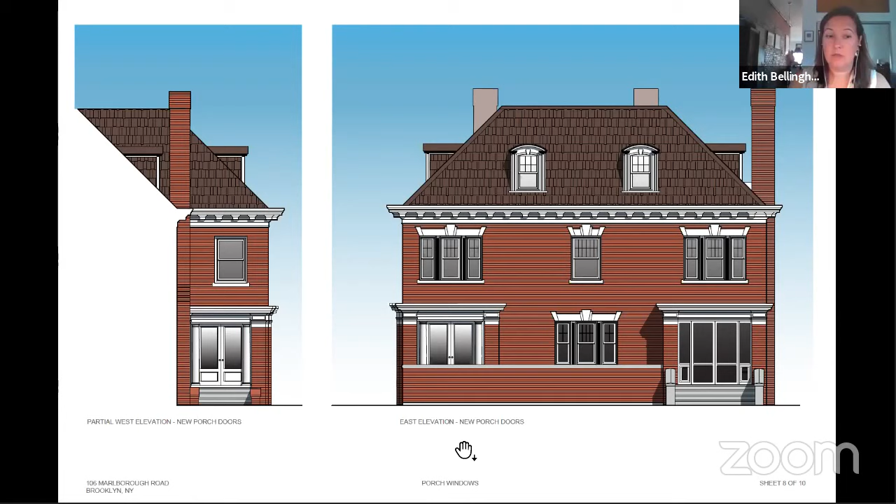At the long south side, the new panels will be hinged. The existing wood floor will be removed, exposing the original brick, and a new stone sill will be installed between the columns to divert rain away from the new panels. The columns and the wood trims around the porch will be fully restored.

Along with the ongoing restoration work on the interior, we believe that the new windows on the porch will preserve the dignity of the original design and enhance the character of the district. That's the end of my presentation. Please disregard the next slide, as the details are not coordinated with the final design.

Okay, thank you. Commissioners, do we have any questions? Not seeing any questions, we'll move to testimony. Lisa, do we have anyone signed in to speak? We do not have anybody signed up to speak, and I also do not see any hands raised.

Okay, and Rich, do we have any written testimony? We don't, and the community board waived review of the application. Okay, so commissioners, any final questions?

The two components of this application are the HVAC units on the rear roof and the removal of the leaded glass windows at the porch and installing new windows set behind the columns.

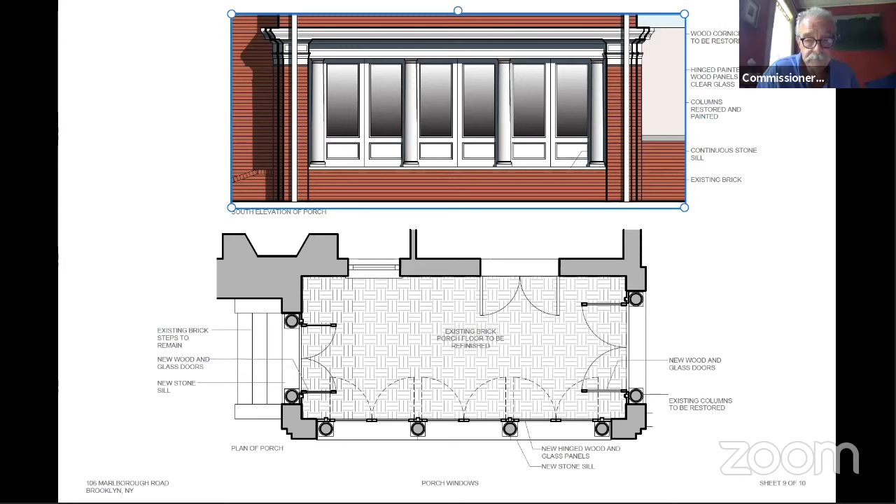Chair Carroll, aye. Commissioner Bland, aye. Commissioner Shamir Barron, aye. Commissioner Chapin, aye. Commissioner Chen, aye. Commissioner Devonshire, aye. Commissioner Gustafsson, aye. Commissioner Jefferson, aye. Commissioner Lutfy, aye. Commissioner Holford Smith, aye. Okay, with 10 in favor and unopposed, the motion carries. That's approved. Thank you.